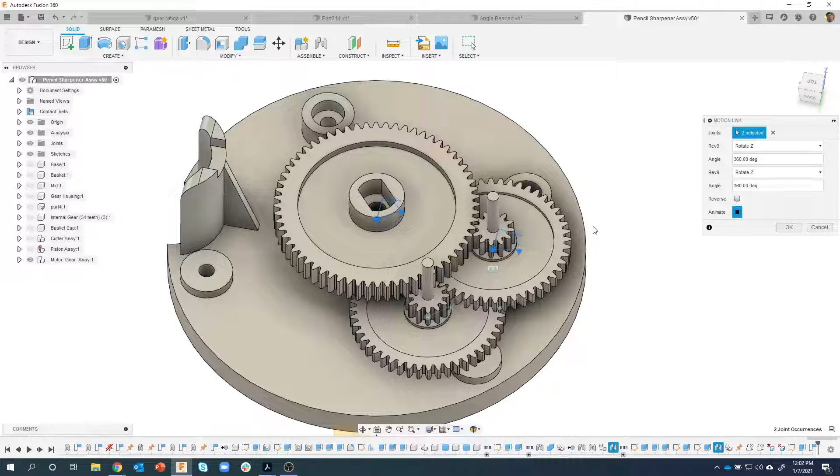I'm going to give a shout out to our friend Blaze Barrett. He shot me an email and said you can just type in the number of teeth and it'll figure it out automatically. I was like, no, that's not true. And guess what? It actually is.

Here's a quick example. You can see I have a 24 tooth gear and a 6 tooth gear, and right now I don't have any motion link between the two. I'm going to come in here, say motion link, and it's going to ask for the two revolute joints. I click that guy and that guy, and you can see it gives a quick animated preview. For this larger one, which is Rev 1, I'm going to put in 6 teeth, and for the smaller one, I'm going to put in 24 teeth. Let's reverse it, and instantly you'll see the animation updates accordingly.

I was blown away, I didn't know you could do this. So Blaze, and actually a couple other people mentioned this too in the comments, I can't remember all the names. High five to all of you out there that knew this trick that I didn't know. I wanted to make sure I shared that with all of you. So all you have to do is type in the number of teeth.

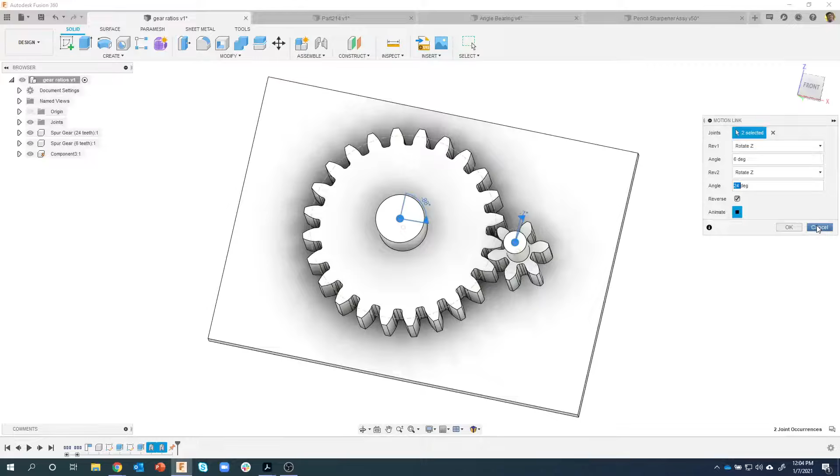Okay, what we're going to do is create this part here, and the drawing - like I mentioned, there's a web page out there where a guy has a bunch of sample drawings. They're in a different language, and this was the drawing that the customer sent me. Unfortunately, I wouldn't say this is the best drawing out there.

So we're actually going to start by drawing this vertical section first, and then we're going to come back and create this horizontal section second. I've linked this drawing, I've linked my outline in the description of the video so you'll have access to these. I'll be referencing this drawing as we go through. Okay, so let's go ahead and get started here.

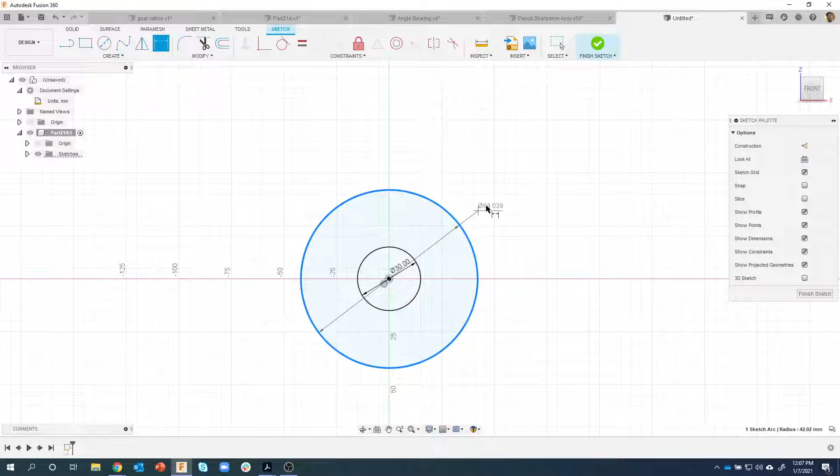I'll do another circle. Now this one's a radius, so I'm just going to click somewhere like so. D for dimension, and you'll notice by default it's trying to do a diameter dimension, but if I right mouse click I can do my radius dimension. I've shown this in other live streams. So let's go ahead and make that 27 like so.

Looking at the drawing real quick, there's another circle down here. Again, it doesn't show how far over from this circle it is, so we're going to have to make some assumptions there. We're probably going to have to wait until we get some other geometry built. We do know that it's 50 millimeters down, so I'm just going to draw another circle kind of down here somewhere, and that is supposed to be a 24 millimeter diameter. I know that it is 50 millimeters down, so that was pretty close, 53. So I'm going to type in 50, and now that circle is down in the correct location.

Okay, so we've got the larger circle, the radius 27, the diameter 30, the diameter 24. Now what I want to start doing is creating the rest of this geometry here. Like I said, we're going to make it into two separate parts that are kind of joined together. Again, I'm making an assumption that this line here is in line with the center of the circle, so I'm just going to mock up this shape over here in Fusion.

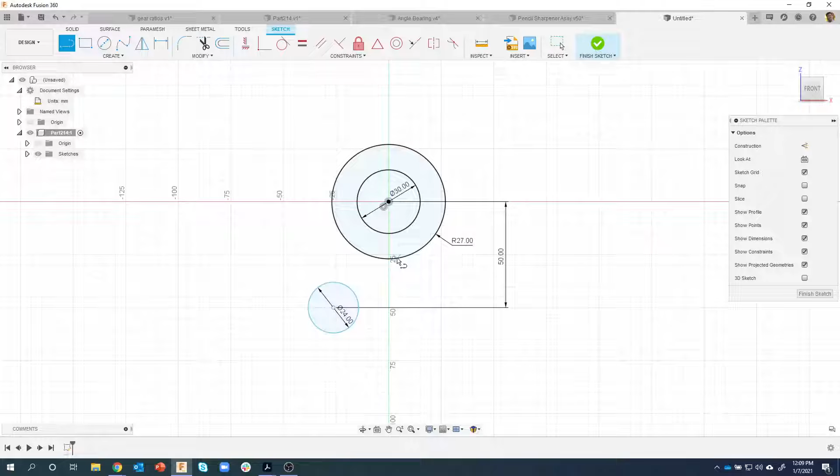Using the line tool, I'm just going to get sort of close to vertical. I'm going to over exaggerate over here just so you can kind of see what I'm doing. I'm going to make sure I come straight down, come straight over, come up a little bit, and I'm just going to go to the left. I have no idea how far. And I'm just going to go up a little bit. I have no idea how far. We're just kind of mocking up the shape of the part.

Now I want to obviously make sure that this thing is correct. So what I want to do is make sure that this line is in line with the center of the circle. So I'm going to click on that endpoint, say horizontal vertical, and I'll click on that endpoint there, and you can see that it moved over. It's changed color to say that that's fully constrained.

Okay, we know the width of this little rectangular area is 56 millimeters, and then we know that the circle is 20 from the bottom. Okay, so we can use that information. So I'm going to put a dimension here. That is supposed to be 56 according to the drawing.

And then I want this circle to be right in the middle of this rectangle. So check this out. I'm going to move this dimension down just a little bit like so. I'm going to put a dimension from here to this edge, and I'm going to place that dimension. Now what this allows me to do is I could type something in, or I can click on this dimension and you can see that it references it. So I just clicked on that 56, it referenced that dimension, and I could say I want this to be half of whatever that dimension is. So I'm going to say divided by 2.

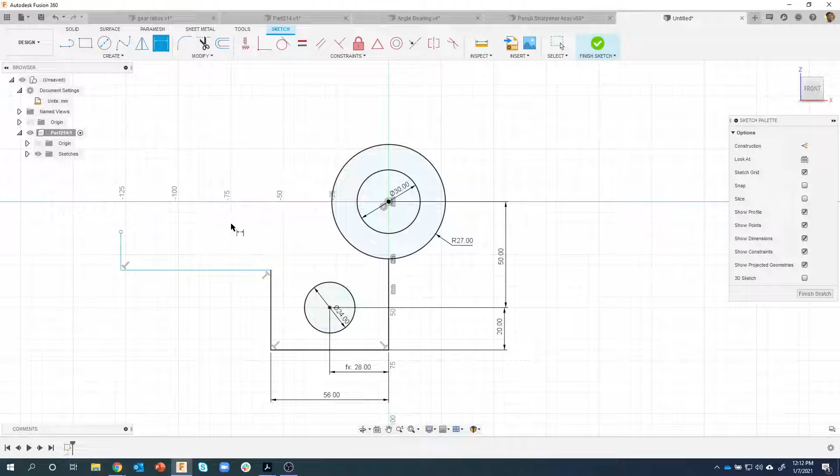Now again, another assumption I'm making here is that this line is in line with the bottom of this 27 radius circle here. So let's do that. Basically it's going to be in line with that. So I could come in here and say I want this to be horizontal vertical with that point there, and you can see it moves that up, and now that line is in line with that point there.

The only thing I have left is this little guy right here, and again, according to the drawing, we don't really have any information about how far over that is or anything like that. So what I'm going to do is use this 145 millimeter radius and start building that, and then have that line connect to that radius.

So let's go ahead and draw a circle, just kind of out here in space somewhere. I don't really care what size. Then I'm going to come back and dimension it. Right mouse click, and instead of diameter, I want it to be a radius, and it's going to be a pretty large radius, 145. And we can see it created a pretty large circle.

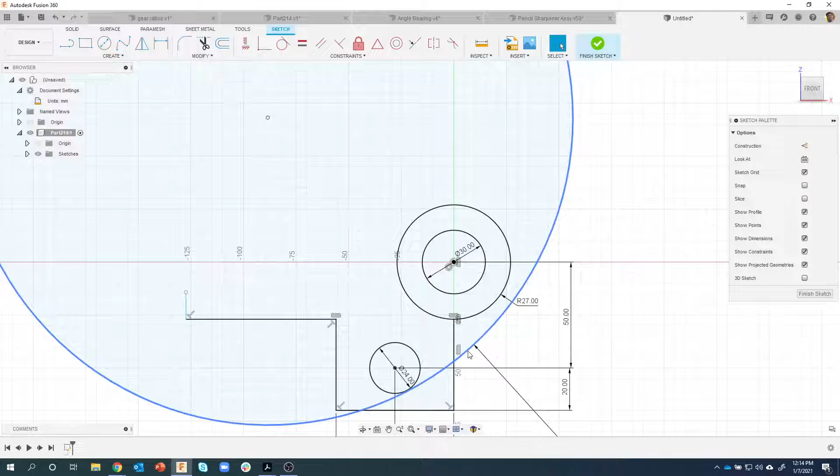Now, a tip that I like to do is get the circle kind of where it's supposed to be. Not exactly - I'm not going to try and get it to touch that circle right there. I'm just going to get it kind of like so. Maybe I'll grab this point, bring it a little bit closer to where it needs to be.

The reason for that is if I had left this circle down here and said I want this circle to be tangent with this circle up here, it's actually going to snap it and make it tangent down in this area over here, because it's going to go to the closest that it can. So that's why it's better to get it where it kind of sort of needs to be.

Then we can come in and say I want this circle to be tangent with this circle. And sure enough, we can see that it did that.

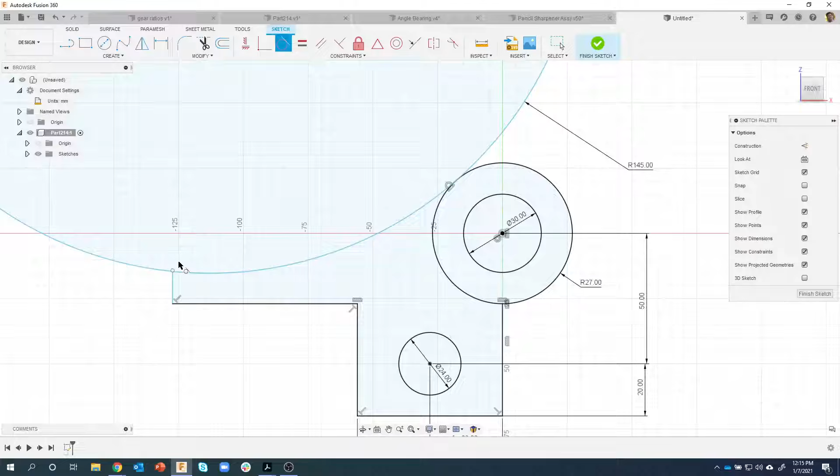And then I want this point - in fact, let me move this point down so we can kind of see what's going on. I want this point to be coincident with this circle here. So I'm going to say coincident that with that, and we can see how it brought the circle down, and that point is now coincident with that circle.

Well, the last thing is we can see that this height should be 16. So I'm going to throw that dimension on there. Let's throw a dimension on this edge right here and type in 16. And we can see that that circle is tangent there, and this is tangent there, or coincident there.

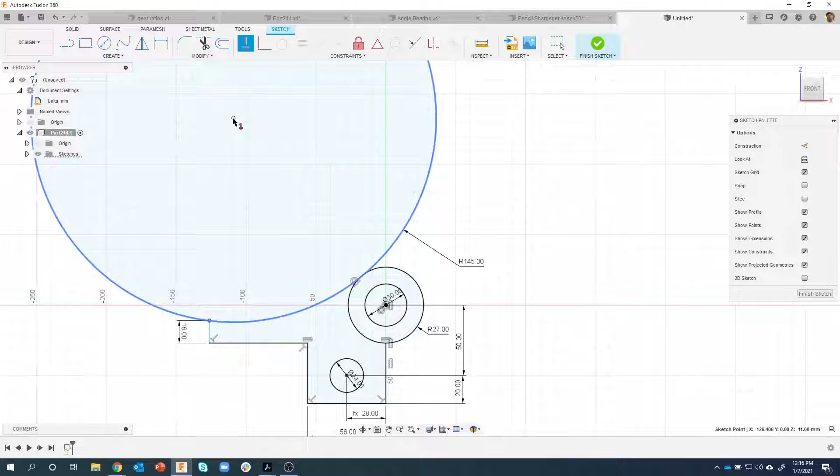And I want it to be, let's just say, in line with the center of this circle. So the last thing I'll do is a horizontal vertical - I'll say I want that point to be horizontal vertical with that point there, and you can see that sure enough everything has now turned black, which means it's a constrained sketch.

In fact, if I expand this guy open, we can see that little lock icon on my sketch means that everything's locked down, so we're good to go.

So it took me a little bit of effort to figure out, making assumptions, but you can kind of see as we came through, we lined things up. We used dimensions to define where things were located.

Some of this stuff here, we just said make it in line with that point there, but we don't know what this length is. We knew what this length is, and we wanted to be in line with the center of that circle. Okay, so now I have the basic shape.

Now I could come in and trim this circle in my sketch, but honestly, I don't really ever do that. I just like to come in, select my profiles, and we'll say extrude.

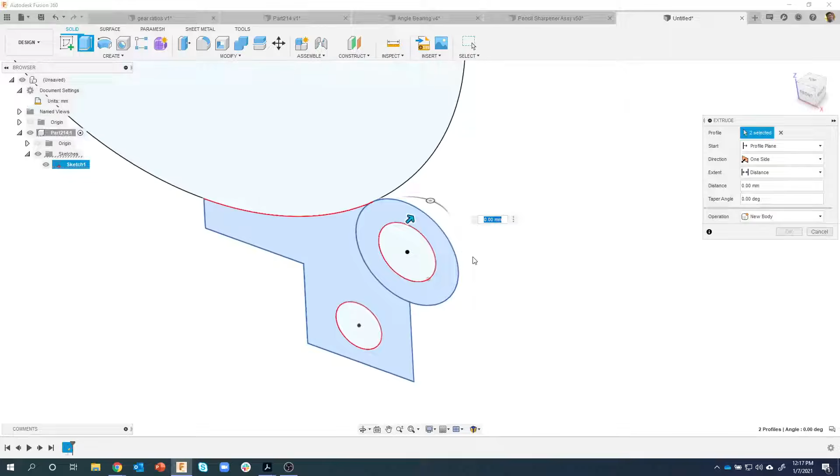Now this is a pretty symmetric part, so I'm going to change my direction to be symmetric. What that means is it's going to extrude in both directions the same distance, keeping my sketch kind of in the middle. When I do symmetric, you'll notice I get this measurement option, half length or whole length. I'm going to say whole length, and the overall distance is supposed to be 22.

I'll say OK, and I now have that part created.

It's got some filleted edges, so I'm going to select one of those edges and say fillet, 6 millimeters, again according to the drawing. I'm just going to go through and select the other ones, and you'll notice because I'm in the fillet command, it's allowing me to probe through and click this edge without even having to rotate. So kind of a cool little trick.

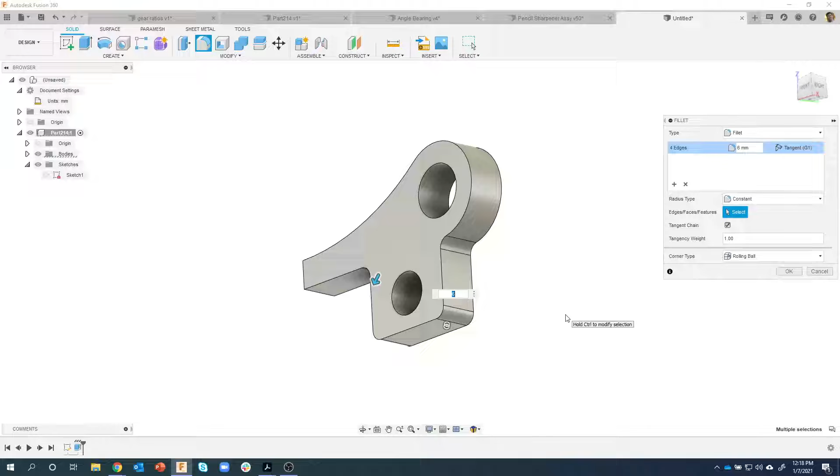Okay, I'll go ahead and say OK. And if we look at our drawing real quick, we kind of have that part all created.

We'll come back and we'll do the chamfers near the end or whatever. Okay, so the next thing is to kind of work on these little wings, whatever you want to call them.

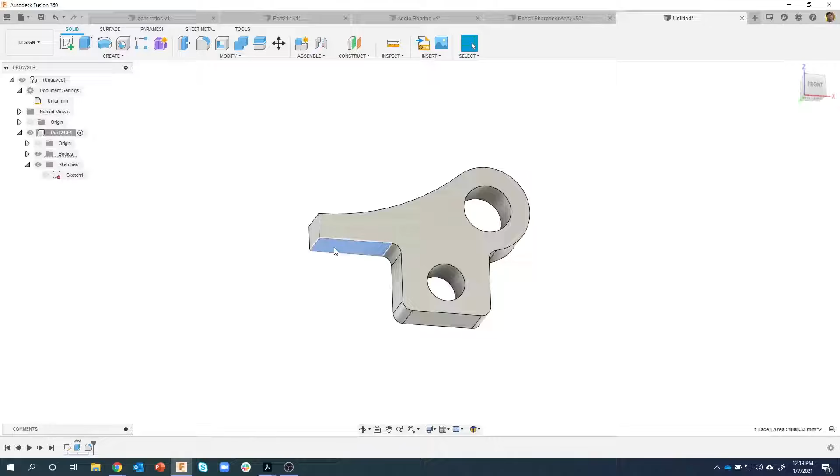Now I'm going to create my sketch on this face right here. The reason for that is we're going to extrude up to this point, and it's going to join everything together. I don't really have a flat face right here. I could create a plane at a point in a certain direction or whatever, but because I already have the plane right there, I'm just going to use this guy and say create sketch.

And now we put a piece of paper on that face, and we'll go ahead and create a slot because that's kind of what the shape looks like. So I'm just going to click a couple points. I don't care what size right now. Let's go ahead and just do something like that.

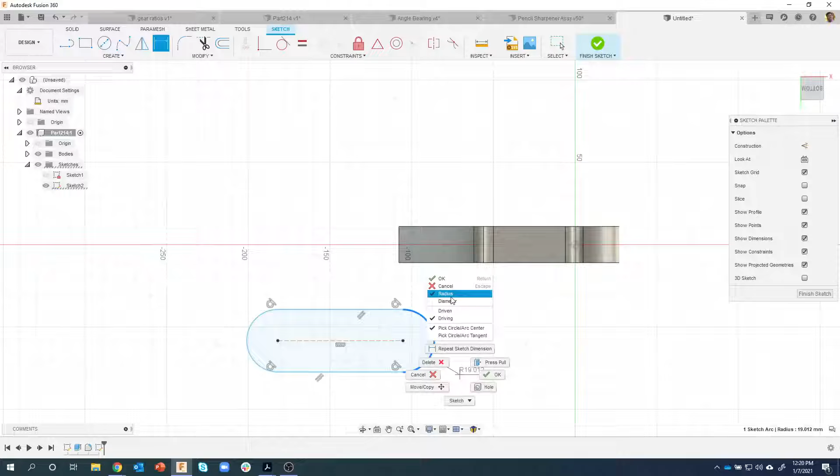Okay, and now I can come in and dimension this guy. You'll notice when you originally create the slot, it's asking for a diameter, but by doing this dimension, I can do a radius or a diameter. So I have the option here. According to the drawing, it's a radius, so I'm going to do a radius of 10, like that.

I'm going to offset this guy. Oops, not D, offset. Let me hit O for offset. Chain selection is turned on, so I'll go ahead and click that, and you'll see it's going to select all of the edges. And I can offset 6 millimeters according to the drawing.

So let me kind of move this so you can see it a little bit better. If I come in here, we can see there's the radius of 10, and then we can kind of see that this is a radius of 16, so obviously an offset of 6 in that case.

Then what I'm going to do is define where this slot is located. So let's go ahead, and you'll notice I haven't done the width, or I should say the length yet. We'll come back to that here in just a little bit.

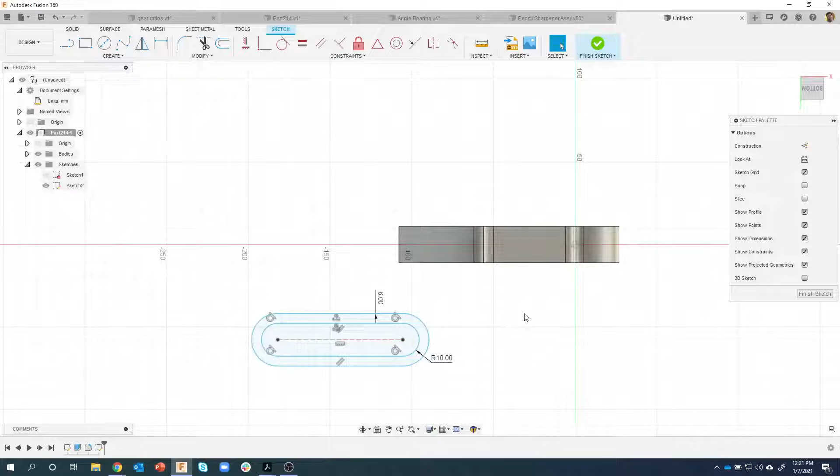I'm going to create a circle. Let's look at the drawing real quick. I'm going to create a circle that kind of defines, you can see this radius 32, and it looks like it's going to be tangent with the slot there. So circle, I'm just going to draw it out here in space.

I don't care what size. I know it's a radius, so when I dimension, I'm going to change it to a radius. And that is supposed to be a radius of 32, like so. I'll kind of move it sort of where it needs to be, pretty close like that.

Okay, now I want it to be touching this object, so I'll say tangent. I'll click on this line right here, and you can see it makes it tangent right there. Then I'll say I want it tangent from there to there. Now if I were to move this circle, it's staying tangent along this edge, and it's staying tangent to the edge of the slot. Because we haven't defined the size of the slot yet, the slot's actually growing and shrinking in size.

I do know I need the arc to be a certain location. We can see in this drawing that it's 89 millimeters from the front of the part and 32 millimeters up from the right side of the part. So let's go ahead and dimension this.

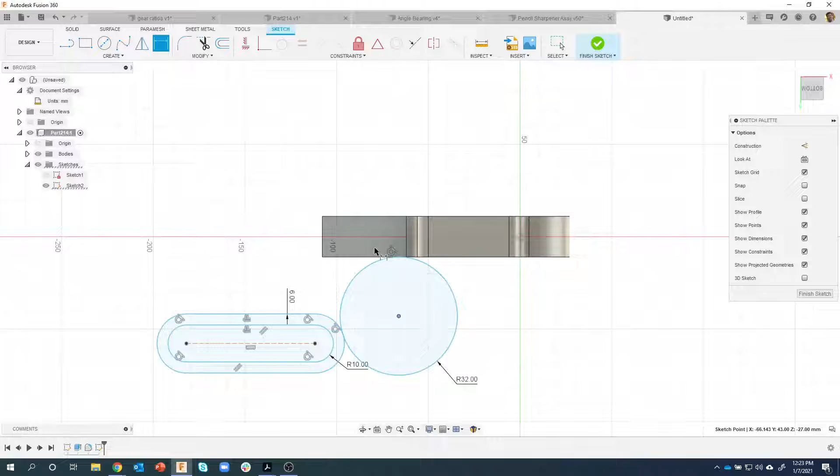So I'm going to throw a dimension from here. Now you'll notice it's not letting me pick this edge right here, and that is because we haven't projected any geometry, and this is a curved edge. If we were to rotate it, you can kind of see, sure enough, that's a curved edge, so there really isn't an edge there for us to pick.

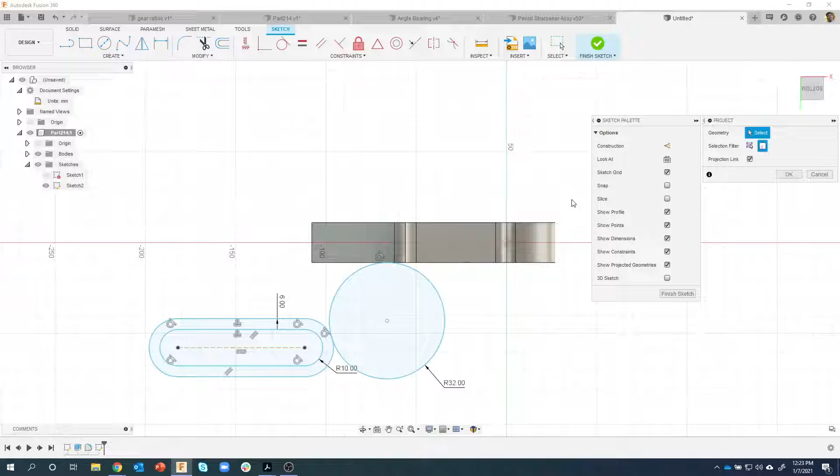So before I can throw the dimension on there, I'm going to do P for project, and instead of doing just specified entities, I'm going to do the whole body, because I kind of want a silhouette of this whole thing. You'll notice the different results. Notice when I do the specified entities, it doesn't really highlight this edge. But when I click on bodies and hover over, you can kind of see that edge appear. So it's almost like a silhouette projection. You will get different results depending on what you click.

And sure enough, I can now see that edge there, which should let me dimension this direction. We want that to be 89, and I think that's all I need to do. And yeah, radius 32, which we did. I'm just checking my notes, making sure I'm doing everything okay.

We did the tangencies. Okay, so the next thing I want to do is we're going to end up mirroring this thing. So let me throw a dimension on the width of the slot. Actually, you know what, let's do that later. Let's just go ahead and do the mirror here. So what I want to do is mirror it halfway across.

And so I need a line, a mirror line that I can use. So I'm just going to click on my line command. Now I want it to be a construction line, so I'm going to come over here and click construction. Then you'll notice as I get near the center of that line, it kind of snaps automatically, and we can see that that's a construction line. I'm going to come over here and it's going to snap to the midpoint there.

And we can see that we just created a construction line. So you can toggle this on or off if you don't want it to be an object line. I'm going to go ahead and toggle that off, and now it'd be just a regular line. If I toggle that on, you can see it's going to be construction geometry. Cool little tip. Okay, so I now have this line that goes across.

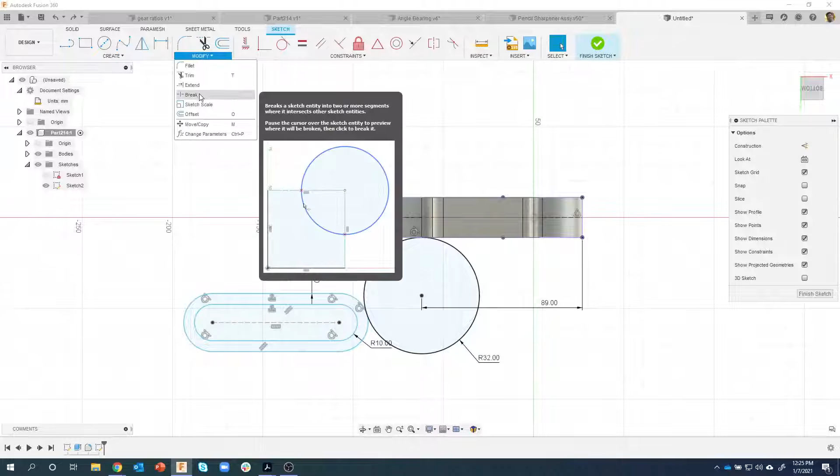We can come in here and say we want to create a mirror. And I want to mirror all of this information, including this circle here. So here's a little bit of a trick. If I try and draw a box like this, you'll notice, for example, it grabbed this object line right here, and not a big deal.

Probably won't matter in this case, but sometimes you don't want it to select that, okay? But if I drew it down here and went like so, you'll notice it didn't select that circle, which I do want. However, if instead of left to right I go from right to left, you'll notice it's doing a different window, and this is called a crossing window. So it's going to select anything inside the window and anything that was being crossed by the window. You'll notice that it gets all that geometry, including this circle, but it did not grab that extra little line right there. So again, quick review, if I do left to right, it's going to grab extra geometry that I really don't want in this case.

But if I go right to left, it's going to do a crossing window, and it's going to select everything inside of it and anything that that window was crossing.

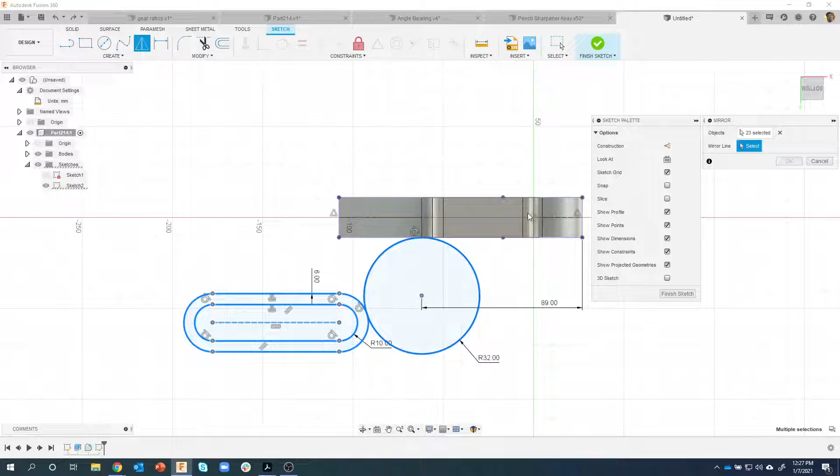Now I can specify this construction line as my mirror line, so I'll click on that, and sure enough we can see that it's going to mirror across to the other side.

Let's take a look at the drawing real quick. This was 44, so I'm going to come in and dimension that. Let me throw a dimension on this line right here, and we'll say make that 44. You'll notice because it's mirrored, this updated also. That's why I waited till after we mirrored, just so you can see whatever you change on one side changes on the mirrored side too.

Okay, moving on here, we're kind of getting the overall shape. The last thing I want to do is create this shape here, and I can see that it's 90-degree lines. They look like they're tangent to the slots, and then there's a radius 16 right there.

So let's jump back in here. I'm going to use this cool little trick where if I just get near the edge and click and hold, you'll see it's going to create a tangent constraint for me automatically. So I'm just going to get close to where I need to go, right there. Then all I have to do is get near this edge and move along it until I see that tangent icon appear, and you can see right there, I'll click, and it created the tangent constraint for me automatically.

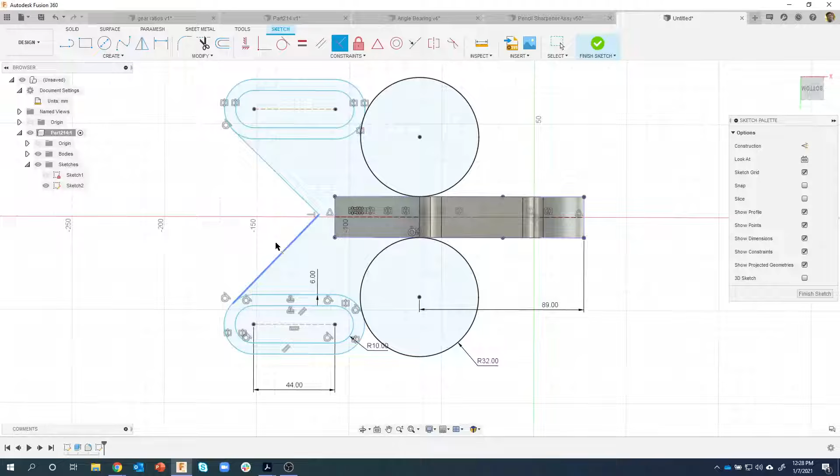Now I want this to be perpendicular with each other, so I'll come in here and do a perpendicular constraint, that line and that line, and you'll see it changed a little bit. Then I want this point to be in line with the center of the part, so I'll say horizontal/vertical, that guy there with that guy there, and you can see that it brought it down.

Now, how come these are still blue? Well, if I grab this line, you can see I can move these slots tangentially up and down along that circle.

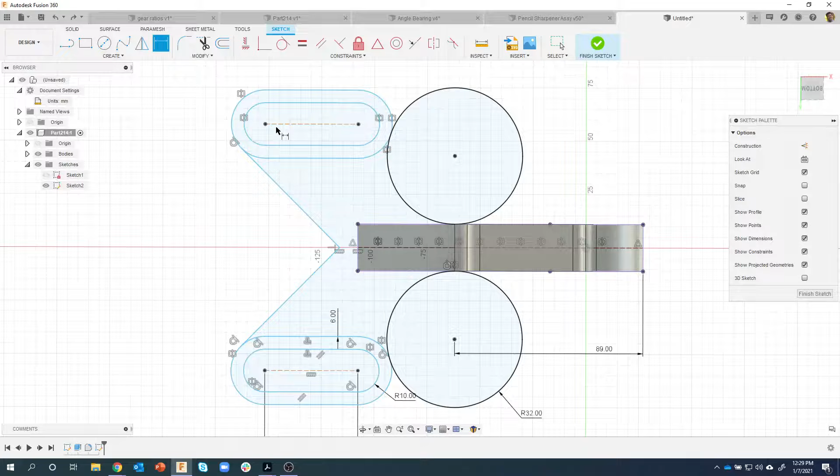Okay, so the last thing we need to do here is take a look at the drawing, and we can see that these slots are 125 millimeters apart. So I'm just using that dimension. I'll throw a dimension from that edge there to that edge there, place it, and tell it I want it to be 125 millimeters. You'll notice that these turn black, which means they're constrained.

Now you'll notice these stayed blue. This is actually an issue I turned into the development team, even though it's fully constrained and you can't change it. So if you end up getting these blue lines, we think it has something to do with the tangent. We're not 100% sure, but it is fully constrained. You can't change these or anything like that. So just FYI, if you're going through this, don't stress over those lines not fully constraining.

Okay, so I pretty much have everything I need. I'm going to finish my sketch. Again, I don't really need to trim anything. I'm just going to grab the regions that I want, which are these regions right here. I'll rotate it so we're looking at it from the top a little bit.

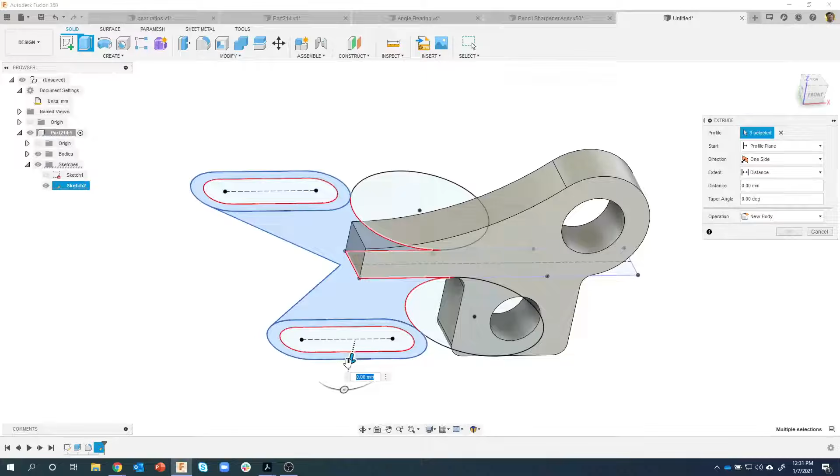I'll right click and say extrude, and I'll start to extrude. You can kind of see what this is going to do. Now, how far do I need to go? Well, I'm going to change the distance, I'm going to say to object. All I have to do is get near this corner right here, and I'll click, and you're going to see it's going to extrude up to that point, to that object.

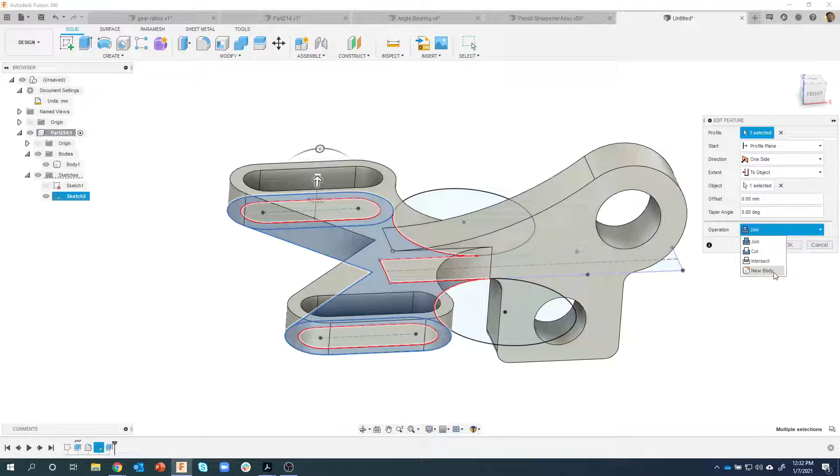I'll say OK, and it joined when I did that extrude. In fact, let me edit it again. You'll notice it says join. So it's going to extrude, and because it's touching this vertical part, it's going to join them together. If I just said new body, it would have created a totally separate body, for example. So now they're joined together.

You might also notice that in the drawing there's a radius back here, and I could have drawn that in the sketch, but I'd much rather keep my sketch simple. Come in here and say okay, let's add the 16 millimeter fillet as an actual fillet feature, like so. That way I can come back and change it if I need to.

So we've got the basics of the part done. The only last thing is to do these little grooves that you can kind of see here. Again, I'm just looking at the drawing.

I can see that they're 5 millimeters deep and spaced 68 millimeters apart from each other. So I'm going to create a sketch on this top face and just draw a rectangle. I don't really care about what size, I'm just doing something like so. We're going to use this to machine a little bit away.

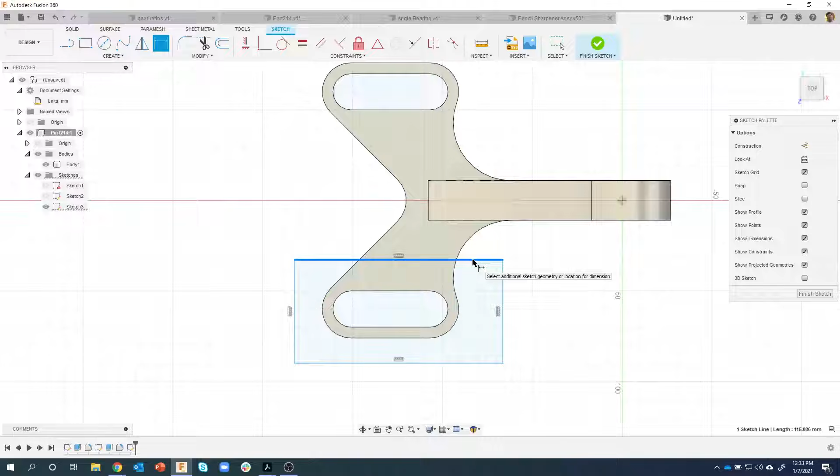However, I need the spacing to be correct. So I'm going to do a dimension from this edge to, let's just do the origin because that's right in the center. And I'll place it over here. Again, I'm going to use that math.

It's 68 total, and I want to go half of that, so I'm going to say divided by 2. You'll see that it will, actually, yeah, I was pretty darn close. Let me undo. Let's do this. I'm going to bring this way down like so, so you can really kind of see what's happening here.

So let me do that dimension one more time real quick. I'm going to say 68 divided by 2, and you'll see that rectangle kind of moves up, and now this line is exactly half of 68 from the origin.

I don't really care about the size of this rectangle. I don't care that it's not fully constrained or anything like that. I could dimension it if I want to, but in this case, I'm just using it as a reference.

I also could just select this as my profile, but in reality I like to select the whole thing. The reason for that is, what if there's a slight draft to these edges or this slot, and if I only do this, it could create little sliver faces. So I like to select all of the profile, almost like a cutter is going back and forth removing this material. I almost think about how this is going to be machined, for example.

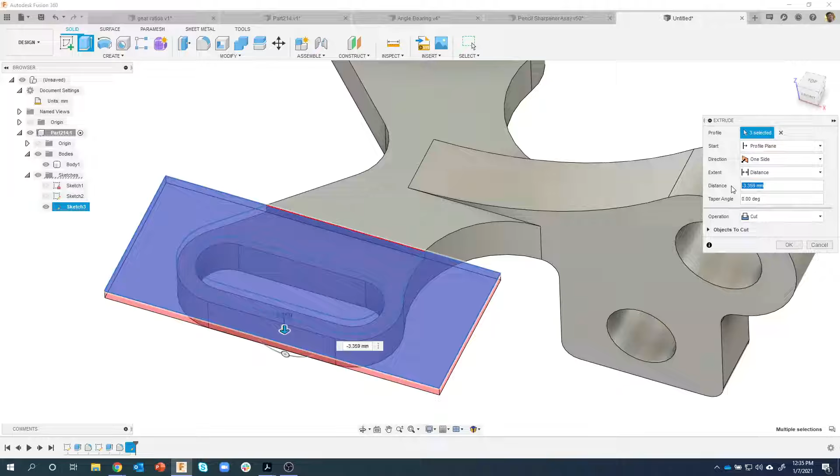So we're going to extrude down in the negative direction, so we'll say -5. We want it to cut. Sure enough, we can see what that looks like. And there we go.

Because we created this symmetrically, our origin is right in the middle of the part. You can kind of see that right here. As I rotate around, you can see that right there. So I have a mirror plane that I can use.

So I could come in here and say let's mirror. What do I want to mirror? I want to mirror the extrude feature. What's my mirror plane? I'll go ahead and click on this front plane you see right there. I'll say okay, and we just mirrored that extrude feature.

Again, I kept my sketch simple, it's just one little rectangle. I could have done it over here and added more dimensions or whatever, but I was able to use the mirror command and mirror it.

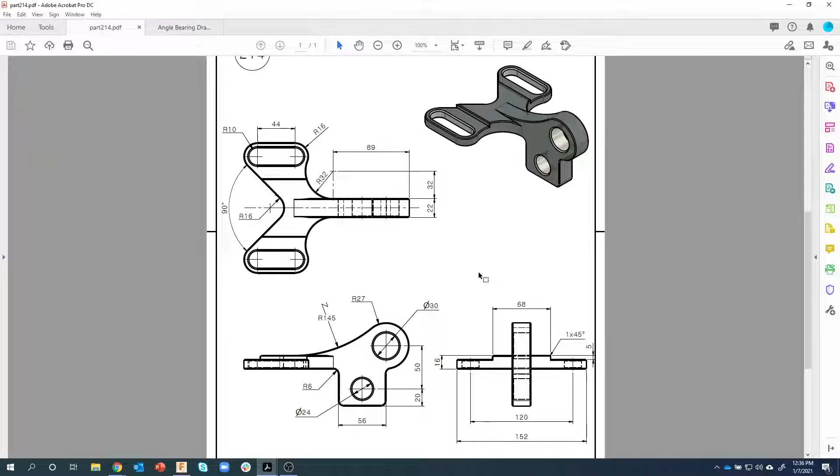Okay, so the last thing I want to do here, according to the drawings, is look at some of the chamfers. We can see that we've got 1 millimeter chamfers, and then we also have, I think it's in the notes, 1 by 45.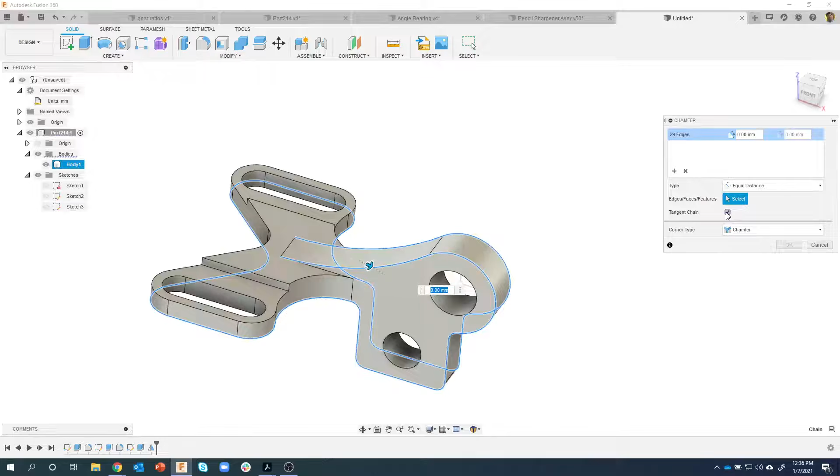So I'm going to go ahead and click on this edge and say chamfer. You'll notice that it selects a bunch of lines because of this tangent chain. So I'm going to go ahead and select some other lines here. You can see that I'm only having to click like one edge and it's selecting a bunch of edges all at the same time. So that tangent chain is really useful.

So I'll go ahead and do that. I'll grab this edge and this edge. But there's a couple edges that aren't chamfered, like this one here and this one here, so we'll leave that alone, and let's just type in 1.

And you'll see that it's going to chamfer all of those edges for me at the same time, going all the way around. Pretty cool.

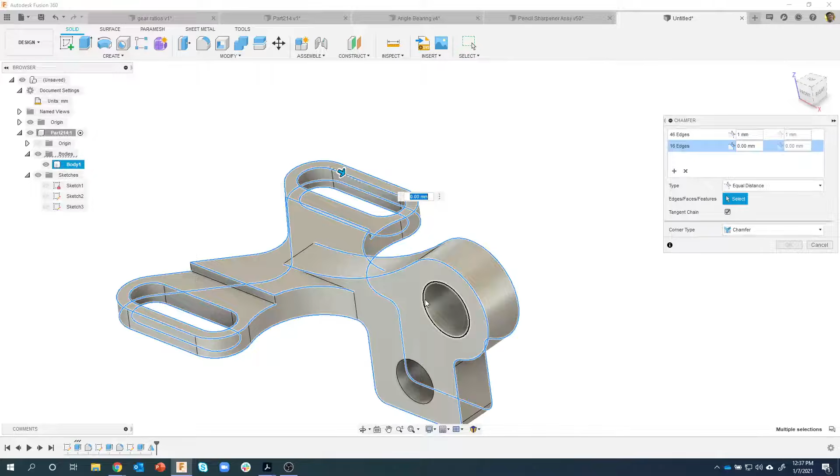I could also come in and add a new selection set. I'll go ahead and click on that edge there, that edge there, that edge there. And then I want to chamfer this edge and the one behind it. So I'm going to just grab the face, and it's going to grab all of the edges that have to do with that face. Let's just do 1.5. You can see that it's going to chamfer those 1.5, and it's going to leave the other ones 1. And it's doing all of my chamfers in one feature in the timeline.

So that's fairly new, we just recently added this. It's very similar to the fillet command, where you can add selections into here and have them be different sizes. You could even have them be different types, whether it's an equal distance or a two distance angle, etc. Pretty cool.

So that's it, that's how I went about creating this model. Hopefully that gives you some tips and tricks on how you would approach something like that, where you think, man, where would you start? Break it down into its simplest forms. Sometimes it's as simple as rectangles and circles, and then you start cutting, machining away, etc.

So another one that came through the Facebook group was, how would you create this part? Now this looks really simple, I mean it's a rectangle with an angled slot. And this one actually caused a lot of commotion on the Facebook group. They're like, oh, you could create surface lofts and do this and that and all this kind of stuff. And I'm like, man, it can't be that complicated. And in reality, it was as simple as I expected it to be.

So I'm going to show you how I came about creating this model. I'd be curious if any of you have other methods, throw them in the chat window or try it out and maybe share it on the Facebook group or something like that.

So basically, the important thing is this one dimension right here, this 1 5/16. That is where this hole is located on this edge. In fact, I actually grabbed this, let me bring my book up here. This actually came out of my old drafting book. You can see there's the part right there with the dimensions and everything like that. So you can kind of see that 1 5/16.

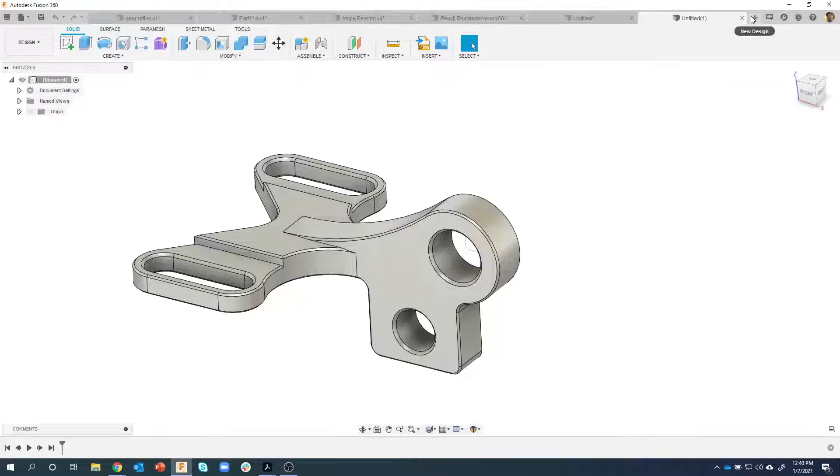So we're going to make it exact. I also picked this one because it has dimensions like 5/16 and 1/16 and 5/8 and stuff, so we're going to do a cool trick with this. Let me bring up my drawing here. So, like I said, that location of that hole is very important to me, and that's the key thing.

So we're going to start a new design. I'm going to create a new component, we'll call it angle block. Okay, I'll expand this open. I'm just going to create a sketch on the front plane.

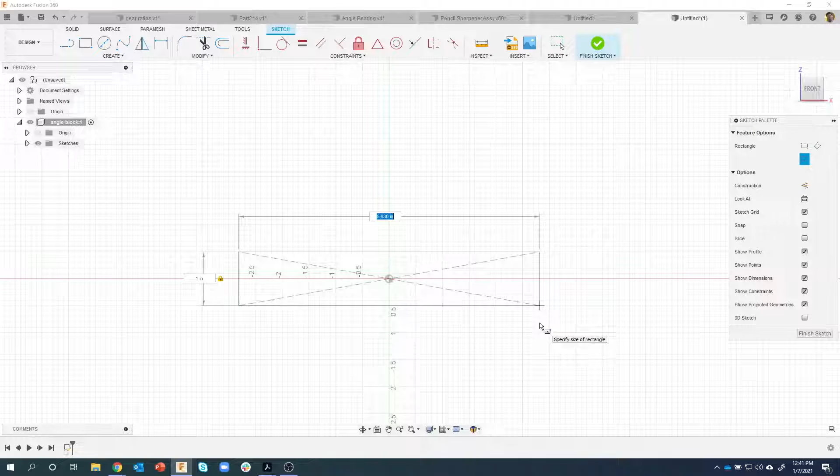Do a rectangle. Now, I like to again keep things symmetric, so I'm going to do a center rectangle, and that way everything kind of comes from the middle. It needs to be 1 inch tall, and it needs to be 4 1/16 wide. But you'll notice I'm in decimal right now, 3.63. Well, check this out, I can type in 4 space 1/16, and it's going to figure that out for me automatically.

So you can do formulas, you can do fractions. You could even come in here and say 4 1/16 plus, you know, let's just say 25 millimeters or something like that, and it's going to figure that out. And if I edit that dimension, it actually remembers those values in there. It's pretty cool, didn't even have to change my units.

So okay, so we set it back to 4 and 1/16, I'll say okay. Another tip I've shown before, I could say finish sketch, or I can just click on my profile, right mouse click, and I can extrude right from here, and I don't even have to hit finish sketch.

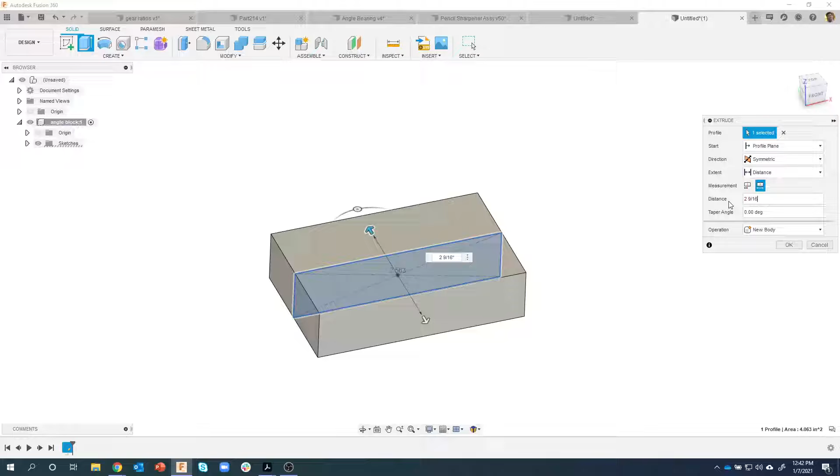I'm going to keep it symmetric, like I said, I like to kind of keep things symmetric. Now this is 2 and 9/16, so I'm going to say 2 9/16 for the whole length, and there we go.

Okay, now I need to locate where that hole is going to be. So I'm going to put a sketch on this front face. We'll create a sketch, and I'm just going to draw a construction line from top to bottom, making sure it's vertical, like so.

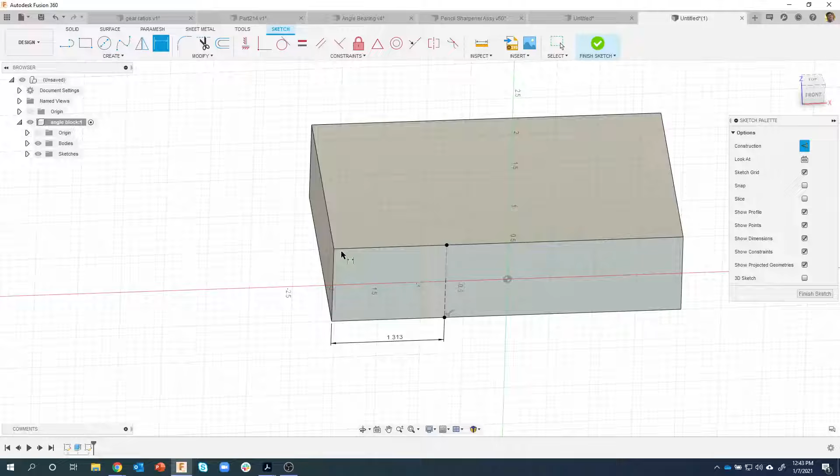Then I'm going to dimension it, and this is the important dimension I keep talking about. This needs to be 1 5/16 over from the edge, and you're going to see it push that line over. So this point is 1 5/16 from the edge of the part.

Now I created this construction line to be able to define another plane in a certain direction. To do that, we're going to say construct plane at an angle, and you'll notice it says line. For example, I could click this edge here, and it's going to let me put a plane along that edge at any specific angle. Or I could come in here, plane at an angle.

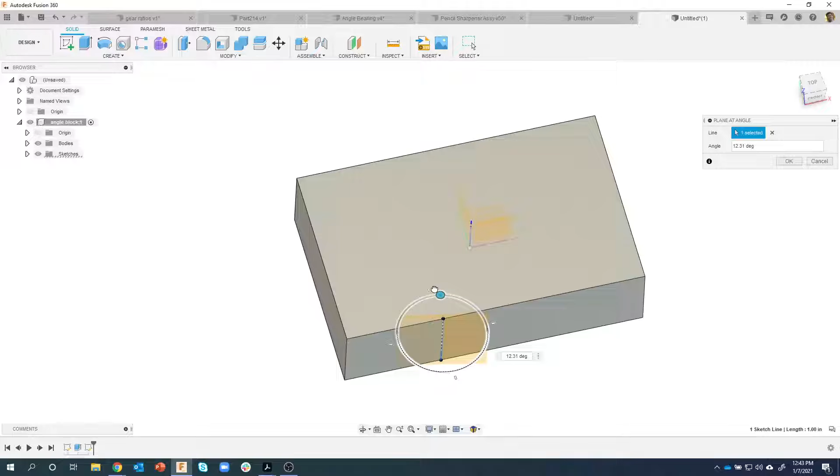What's my line? Well, this construction line is my line. So I can go ahead and rotate, and you can see how it's going to rotate around that construction line. We need it to be at 30 degrees according to the drawing. I'll go ahead and say OK. Now I have a construction plane at a very specific angle at a very specific point.

So now I can come in here and create a sketch on that plane. Notice my view cube, I'm not looking straight at the front or the left or whatever, we're looking straight at that piece of paper, like so. I can create my circle.

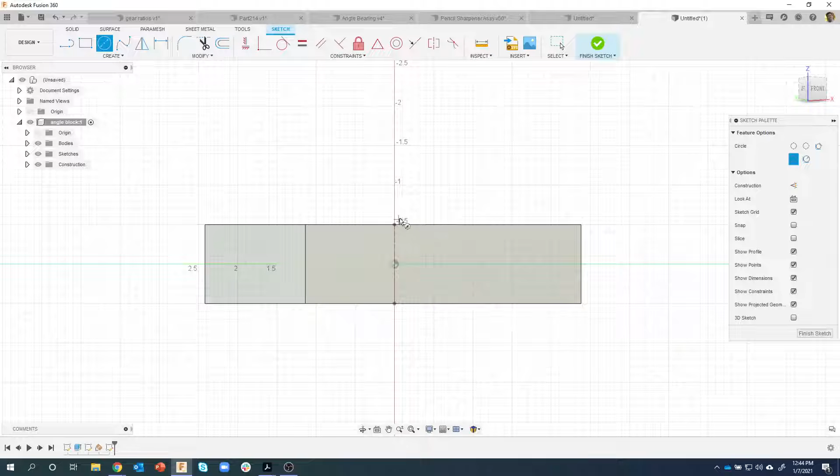Now you'll notice it doesn't seem to be snapping to that point. Be very aware. So if I were to click right here, am I at the correct location? The answer is no, I want to make sure I'm actually snapping right to that point. So I might have to do P for project. We'll go ahead and project the body. Now you can see that point is kind of highlighting right there.

So if I do a circle, that didn't do it. Okay, so let me go P for project. Let's project that edge instead of the body. Now if I do my circle, sure enough, we can see that it's snapping to that edge. So again, make sure that you're getting the result that you want.

Okay, so I'm going to create a circle at this point. It needs to be 5/8 in diameter, so 5/8. We can see that that worked correctly. And then I need to do another circle, this one's a radius, so I don't know what size.

So I'm going to do a dimension, a radius, and you'll notice that my dimension, let me go ahead and say 0.75. You'll notice that my dimension is vertical in this example here, and this kind of threw me for a loop. I learned something new that I want to share with you.

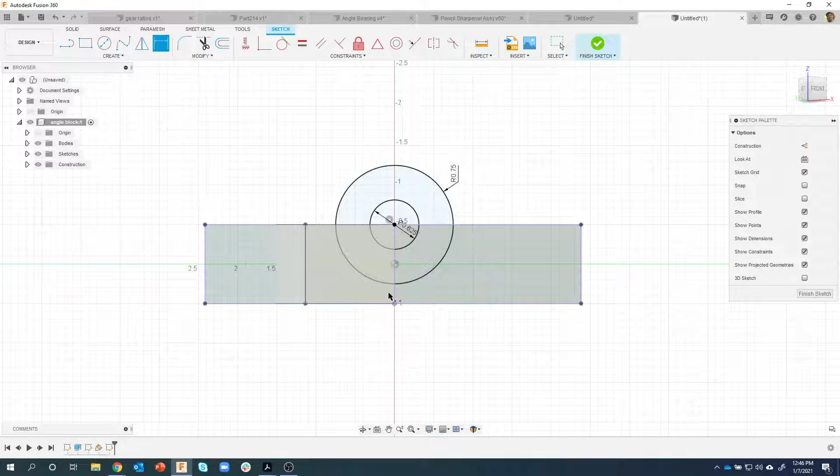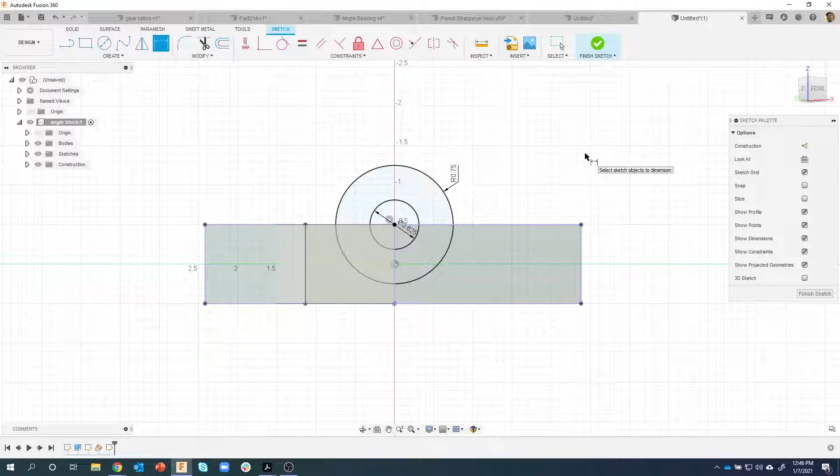Okay, so I got those where I want, I'm gonna say finish sketch. I can now see the part. I'm going to click on my profile here, and again I'm gonna grab everything here, so I'm gonna say profile. Let's grab that profile, and let's go ahead and grab this profile just in case. There's multiple profiles because we're cutting it in half with this projection line right there.

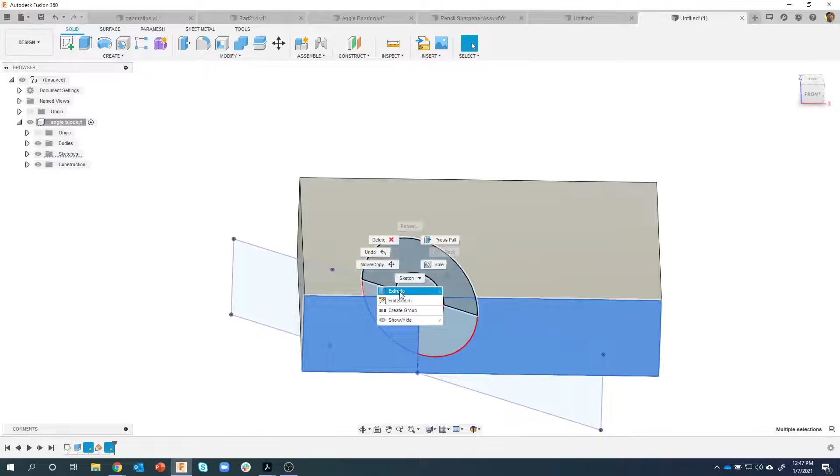Okay, now here's where it's going to get kind of weird, and this is kind of what threw me for a loop. I'm going to go ahead and say extrude, and we'll start extruding in that direction, and I can already see I missed something. I don't want it to cut, I want it to join. Okay, cool, it's taking that profile, and you can kind of see it's extruding it.

Well, I want it to go flush with this face, so instead of a distance, I'm going to say to object. I'll click on that face, and I get the result that I want. You can see it's taking that profile and extruding it at the correct angle to that face. But notice what's happening here at the front.

Okay, I don't want all this extra stuff hanging off the front. Unfortunately, the to-object option only goes in one direction. Now, if I came in here and said two sides, that lets me extrude like so.

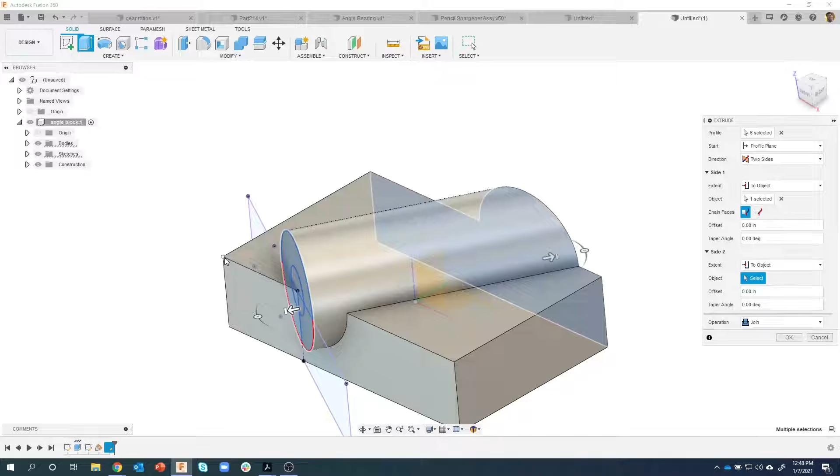And if I say to object, you'll notice it doesn't let me click this front face, which is really weird. It lets me click points instead. So I'm going to click on that point, and you can see it's extruding to that point. Unfortunately, we can only do the to-object option in one direction.

So how do I fix this? Well, what I ended up doing was saying, instead of starting at the profile, let's just offset maybe an inch. What's cool about this is if you think forward here, this is exactly still in line with this point, and that's the important thing. So I'm just going to offset my plane 1 inch, join that together, and say OK.

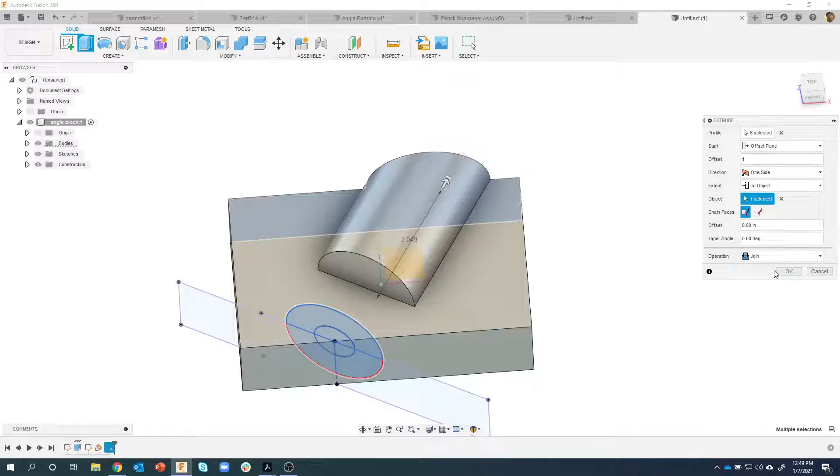Then I can come in here and say extrude one side, how far, to object, and click on that face. We can see that, sure enough, it's still in the correct location. We'll join that together and say OK.

Let's turn our sketches back on so we can see that hole, and you can kind of see what we did here. So we had to do it in two steps, but we now have this angle exactly where it needs to be. All we have left now is the...

Oops, let me do... sorry.

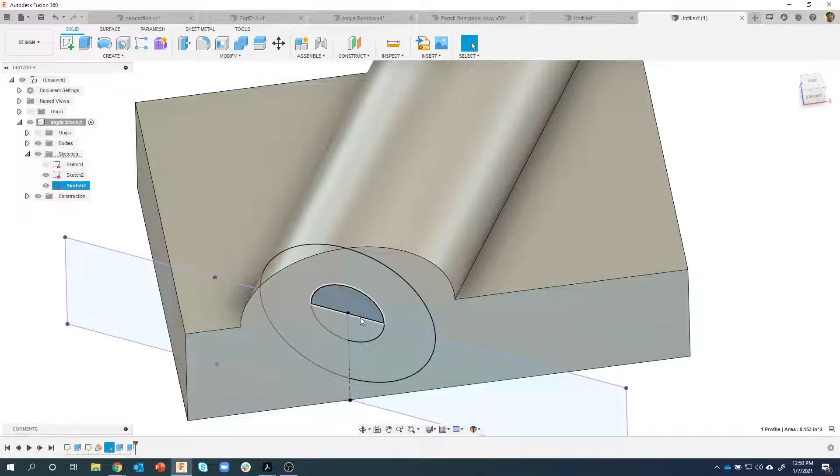We select the profile here and that profile there. We're going to extrude. I like to start the extrude to kind of see what that looks like. I'm going to say, instead of distance, extrude all, and it's going to go all the way through the part in one direction.

Just like we ran into previously, it only goes in one direction, and you'll notice there's this weird little sliver going on here. So there's two different solutions you could do here. I could change it from one side to two sides, and then just bring this out a certain distance.

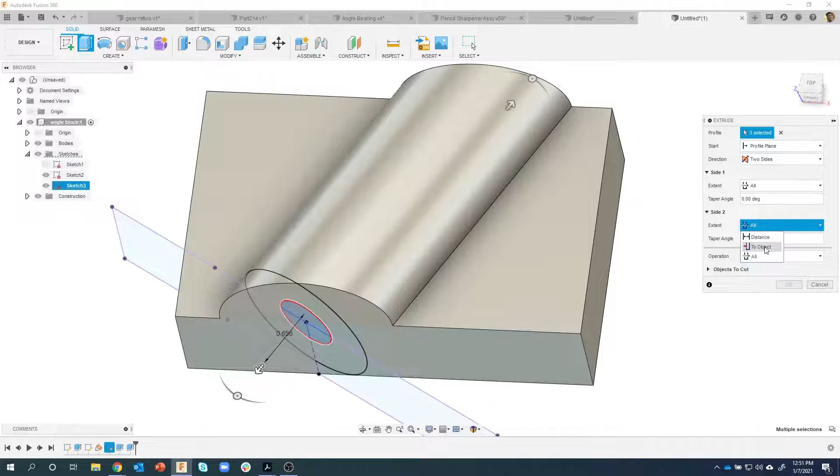Again, I can't say all—it throws an error. It doesn't like that for whatever reason. I also can't say to object; it doesn't let me pick that front face. So I could do a distance like so.

Or I could leave it one side and say okay. Then I could just come in here and click that face and hit the delete key on my keyboard, and Fusion's going to heal that geometry. You can see it did add a delete feature into my timeline.

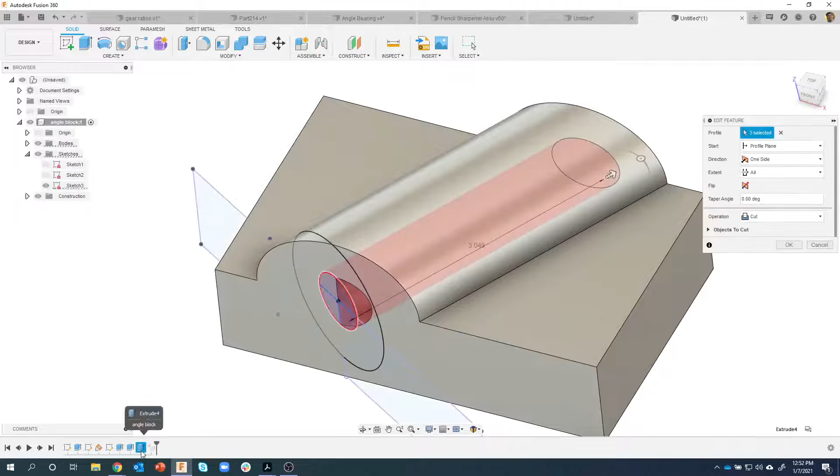I kind of like this solution better because if I were to come and change the width of this block, no matter what, that face always has to delete. Whereas if I had changed the extrude and did the two sides, and only came just far enough, but then we made the part bigger, this distance is going to stay right here and that weird sliver is going to show up again. So that's kind of why I like the delete face.

Okay, I'm not going to finish the whole drawing here. It's pretty simple—you know, create two little rectangles and machine those through. Same thing with the holes. I'll go ahead and do the holes so we can kind of see where those are located at. I'll just show some tips and tricks with that.

So I'm just going to click on a face and say hole, and I can position it where I want. Right here, you'll notice it says reference, and you can even see as I hover over on these edges. So I'm going to click on that edge.

And the hole needs to be 9/16, so I'm going to type in 9/16. You can see it jump over. I'll go ahead and click on that one there, and it needs to be 1 and 9/32—you can see it jump down there. Then I can come in and specify what kind, what size hole it is. So it's a 1/2 inch hole.

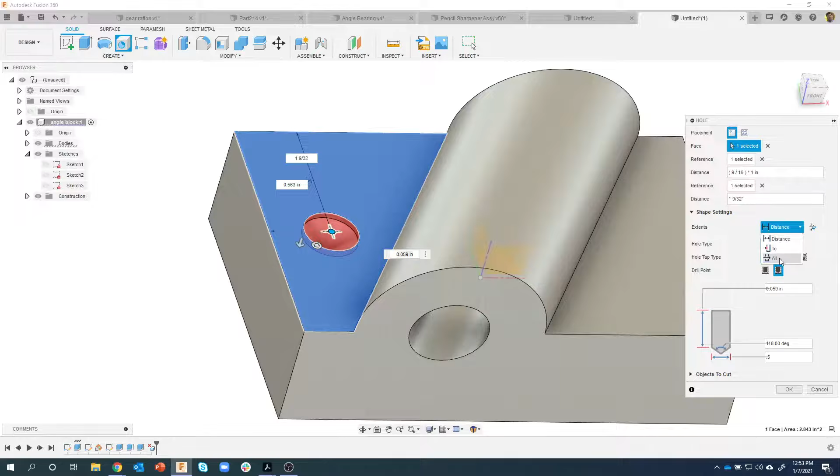I want it to go all the way through, so you can see just by changing it to all, it goes all the way through. I'll say okay. And again, because I did this symmetrically, I could come in here and say mirror. What feature? The whole feature. What's my mirror plane? That mirror plane right there. I'll say okay. And again, if I were to change the width or length of this block, that hole is always going to stay in the correct location, and that one's always going to be mirrored symmetrically around it. That's one of the reasons I like to do things symmetrically.

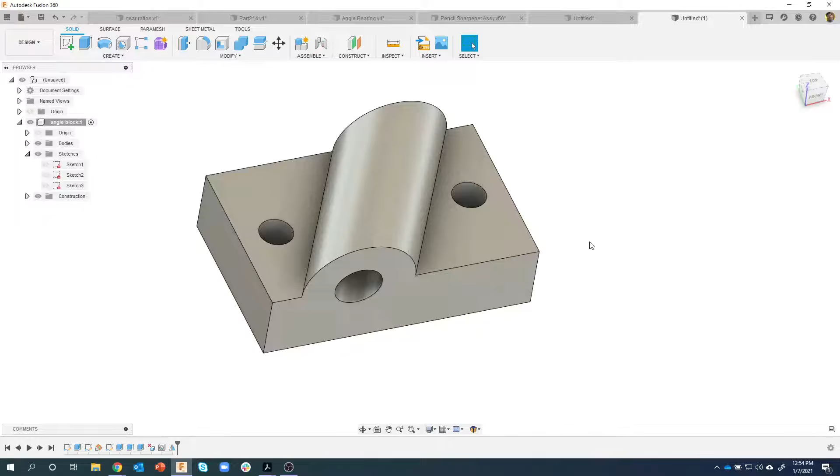Since we have a couple minutes, I'll go ahead and create a sketch here. I'll throw a rectangle on here and another rectangle over here. I could do that, or I could just throw a dimension on this guy, and he's supposed to be 3/8, so I'm going to say 3/8. This one is supposed to be 5/8, so I'll say 5/8.

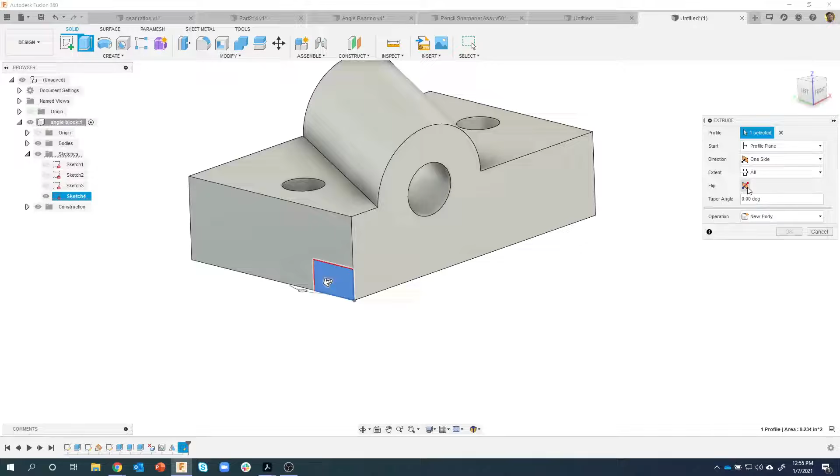I can click on this and say extrude. Now here's another tip. I'm going to say go through all, and you'll notice nothing happened. But notice the direction the arrow is pointing. Right here it says flip, so I'm going to hit flip, and now it's going in the correct direction. So if you change it to all and you see nothing happen, just go ahead and hit this little flip icon. We'll say okay. I could mirror that guy.

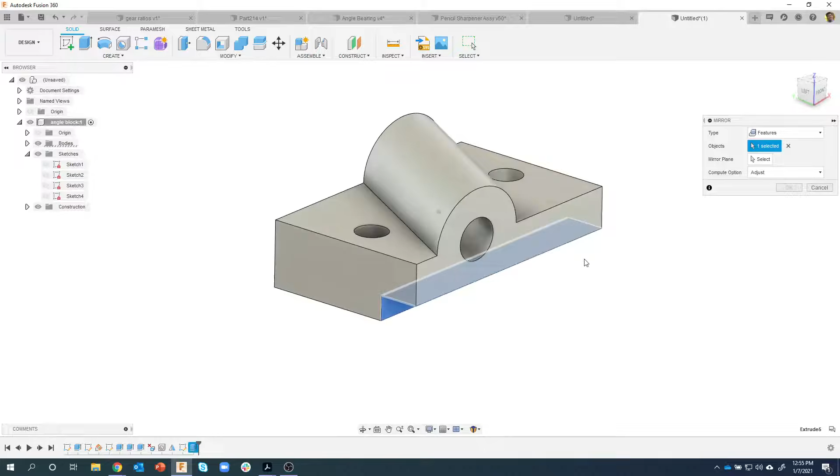So I could say mirror, what's the feature? The extrude feature. What's my mirror plane? That front plane. I'll say okay, and we get that result. I could have drawn two rectangles and dimensioned them. There's many different ways that you could create this model. I like to use the mirror because if I end up changing the size of the model down the road, everything is going to kind of update accordingly, which is kind of cool.

Okay, so that's that guy. We have a couple minutes. Let me bring up a couple more.

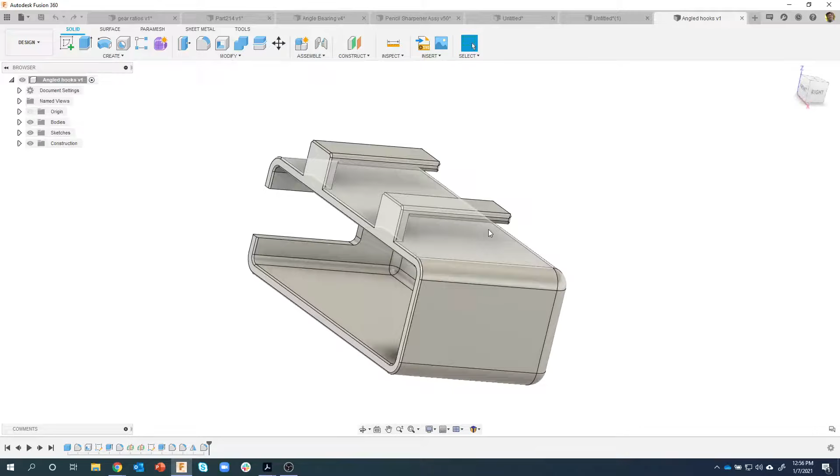This one I saw on the Facebook group, and I thought it was a really valid question. He had modeled a box that looked kind of like this. I'm assuming maybe it hooks onto a belt and holds a cell phone or a tool battery or something like that. After he printed it, he wished that these arms were kind of at an angle a little bit instead of being straight out. Now you could go back and edit the sketch potentially, but let's pretend it wasn't modeled very well, or maybe it was imported from another CAD system.

There was no sketch or timeline to edit. Okay, in fact, let's force that. I'm going to do not capture design history. We now have a model that has no information. But what I can do is come in here and say move. Now I don't want to move bodies, I want to move faces.

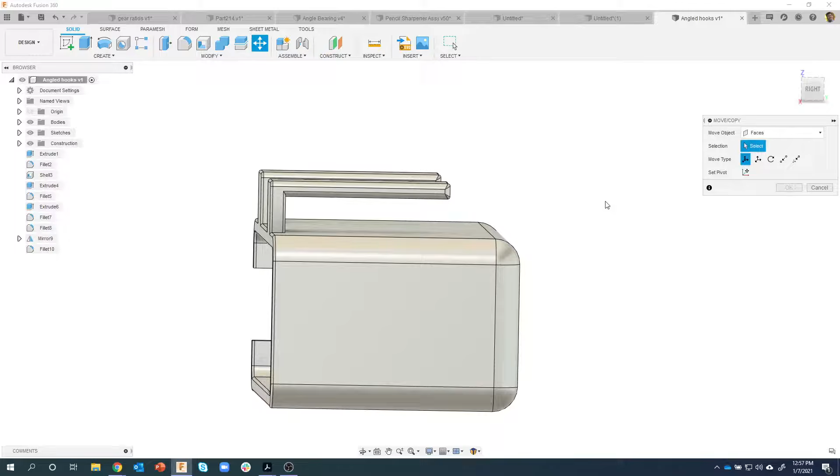Let me show you what typically would happen here. People are like, okay, I want to move these faces. So they're going to draw a selection box around those faces. But notice where the rotate is. I kind of want to rotate it more like over here, along this blend, for example, or that fillet. So right here it says set pivot. I'm going to click on set pivot, and then I might pick maybe like this top edge or this bottom edge right here.

It really doesn't matter in this case. You'll notice it's kind of like snapping to the midpoint, endpoints. Again, that doesn't really matter. I'm just clicking a point, and you have to come back here and say done. So I'm going to say done. Now watch what happens when I rotate.

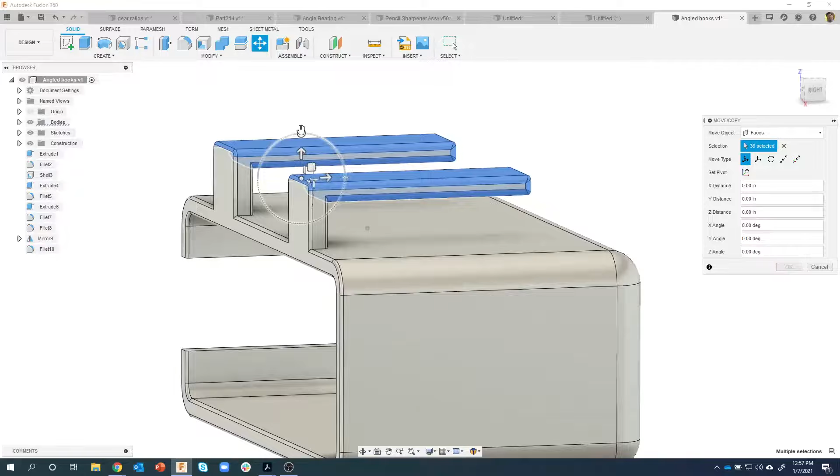The front of the box rotates also. And this is not what you would expect. This is not what you're hoping for. Now we're able to rotate the arms, but I don't want the front to rotate. Why is the front rotating? Well, Fusion's trying to keep everything tangent, and I selected this front fillet. When I drew my selection box, it grabbed that.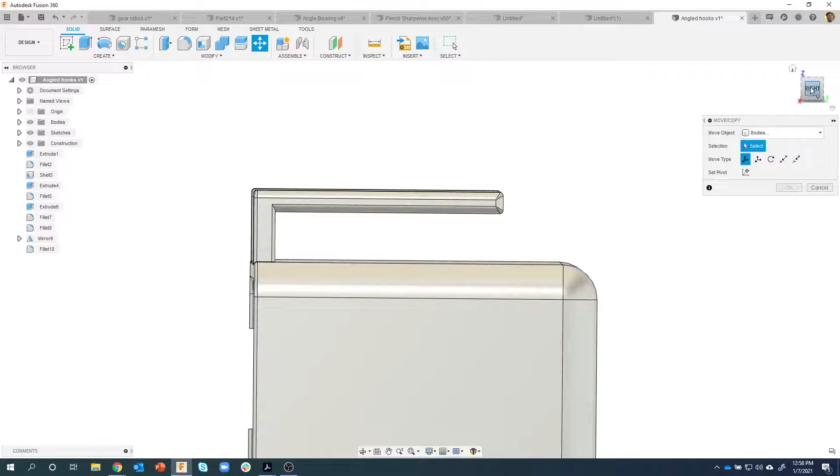Okay, so let's try it a little bit differently. Let's right click and do the move command, and let's just try maybe doing something like this. I'm drawing a selection box. Oops, make sure you're on faces. I'm just going to draw a selection box like so. You'll notice what it's selected.

Let's set my pivot again. I'll pick that exact same pivot point. Let's grab that arrow and notice the result I get now.

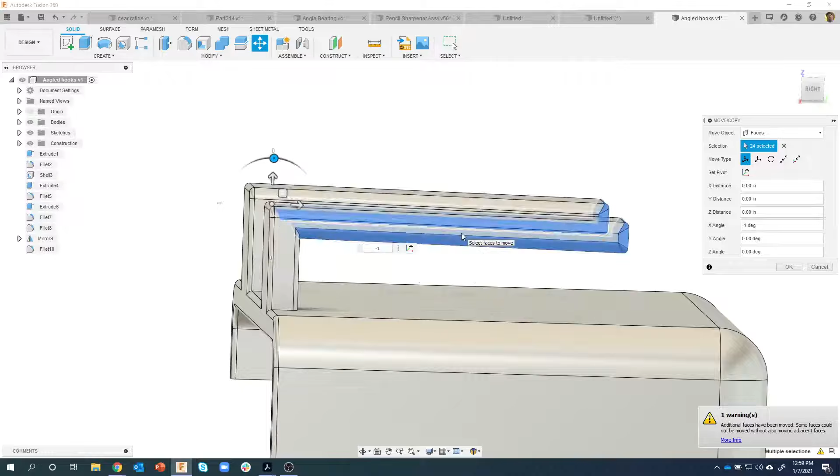Because I didn't select these front fillets, it's moving those faces while keeping them tangent. Now I can come in here and say go minus 15 degrees. Oh, 15 is too many. Let's just do 10 degrees, or 7 degrees. And say OK, and we've now modified this model so it can clip on and be a little bit better.

So hopefully that helps you out. Again, if you get a weird result, try selecting less faces. Instead of doing a selection box like that, do a selection box more like this, for example.

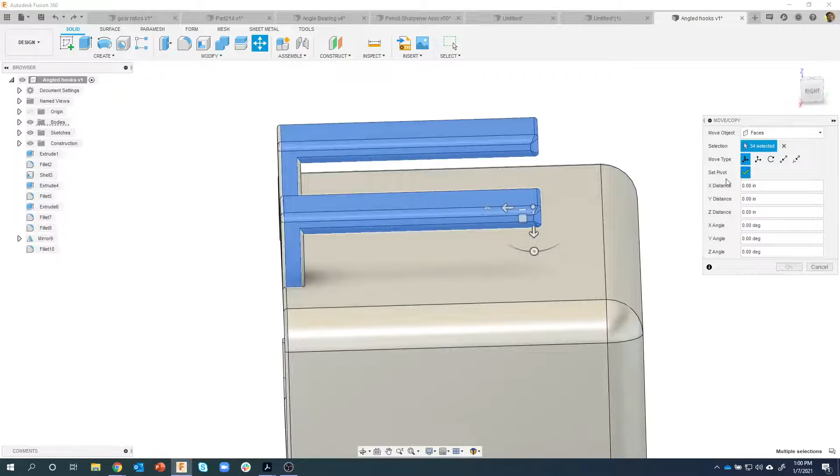Or I might even try, I haven't tried this, let's try doing faces. Let's do right to left and just do something like this. You can see all the faces that it's selected. I'm curious if this is going to work. This is live, so we'll see. Yep, so that worked also.

That might even be the best solution, to just do a crossing selection saying I only want these faces here to move. I don't want any of these vertical faces or fillet faces to move. So that right to left crossing selection is a pretty cool trick.

Okay, the last one, this was actually kind of a cool one. I have a customer who designs speaker boxes, and he needs to create very realistic renderings. So I was showing you could just do a very simple shape and add a material, a cut-through material, and it'll simulate what this looks like. But he actually wants all the little shadows inside these holes and stuff like that.

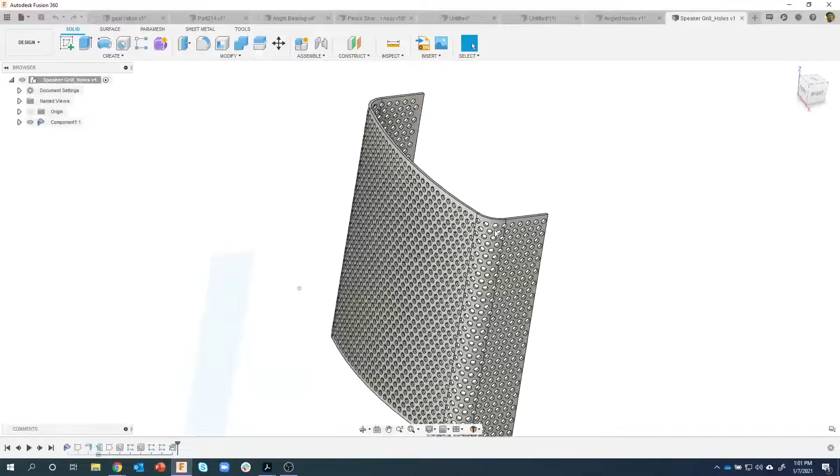So how would I go about creating something like this that actually rolls around on a curved surface, rolls around another surface, and continues on that direction? Well, the trick here is to use sheet metal.

So I'm going to back up here and just step through. I created a sketch, let me turn this guy on, a very simple sketch that defined the top view of my speaker grill. Then I used sheet metal in here to create a flange using that profile so it's the correct thickness, etc.

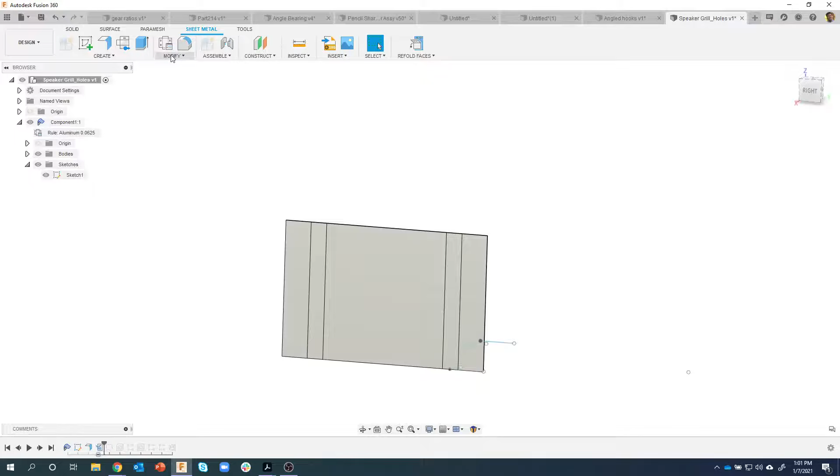Then I unfolded it, so modify, unfold. I was able to pick one of those flat faces and it unfolds it flat. I created another sketch on that face, drew a hole, then patterned that hole, and you can see it goes all the way across.

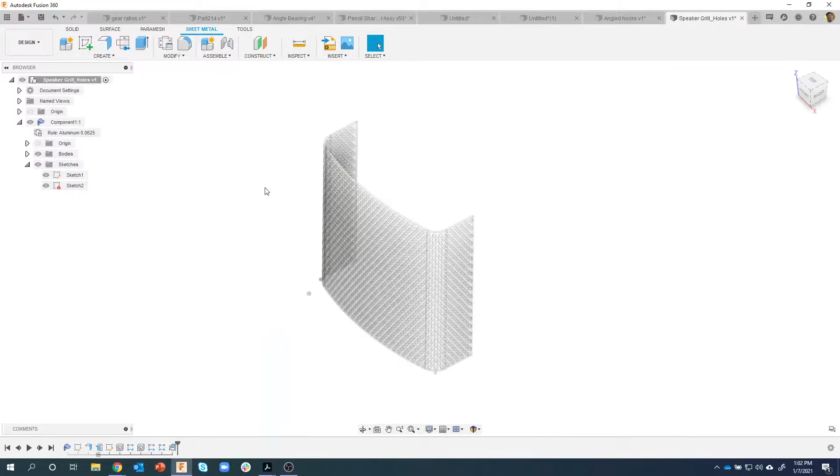Then I created another kind of offset hole like so, patterned that to get the triangular shape there. You can kind of see where I'm going with this. Then I patterned those two patterns up in that direction, and finally refolded the faces. Now, this is pretty complex geometry, so you saw it took a few seconds to do that. So anyways, that is how you would go about doing something like this.

The sheet metal tool is a really cool tool to do odd shapes like this.

So, I hope you learned some tips and tricks on how to approach complex models, something with missing dimensions, or where do I start. How do I create that angled hole but know it has to be a certain distance? You just kind of have to think a little bit outside the box, like what I did with that angled hole. We had to extrude in two different directions, but I was able to make sure that hole was in the correct location using the sketch.